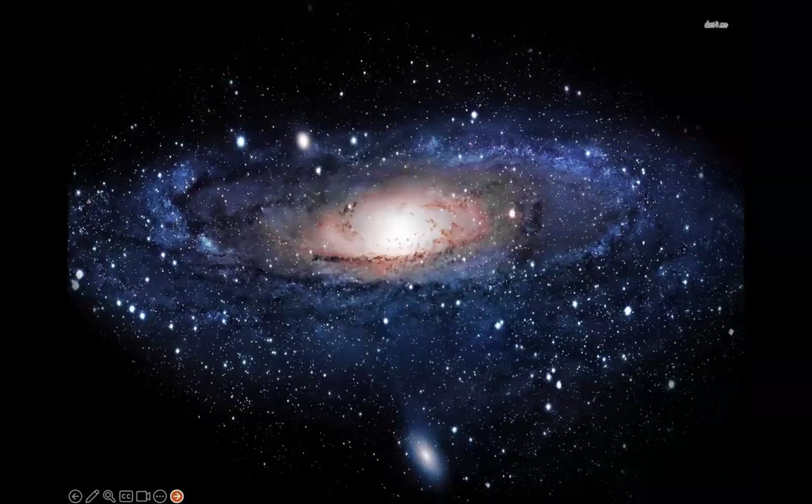So the first is that what makes water so special to me is that it is a part of our everyday and we take it for granted. And it is also a part of everything in nature that is just beautiful and magical.

So we all got up and we showered and we made our coffee or tea and we washed the dishes and our clothes, and in this country especially, water is just always there. We have terminology for when we lose electricity. It's a blackout.

We don't have terminology for when we don't have water. That's just eerie. If you've ever had a summer home and you turn on the faucet and nothing comes out, it's kind of weird because you always expect something to come out. That all being said, for as much as we take water for granted,

when you are hiking through the woods and you come across a brook or a river, if you ever come across a waterfall, or if you are standing on the beach and watching the breakers roll in, we can't help but be taken up by all of the magic, mystery, and everything that water is. We are over 75% water, so it makes absolute sense that we are so drawn to it.

Now, the second aspect of water that I am in love with comes from this image right here. When we talk about other planets and the space exploration that is going on, when we talk about a comet that comes around every 400 years, they talk about that comet being covered in ice. We are going to Mars, and we've discovered other planets, way out in the galaxy or in other galaxies. And we talk about the potential of water on that planet, the potential of water on Pluto, which we haven't even gotten close to yet.

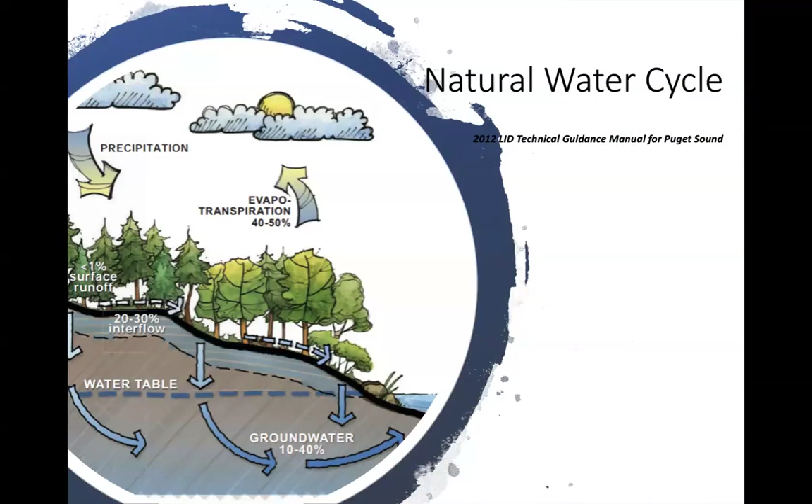This all goes back, and everything you are going to really learn tonight and need to think about water goes back to 5th grade, where we learned about the water cycle. Now, you don't necessarily need to memorize this slide, but I want to draw your attention to a few things. Over on the left, it says surface runoff, less than 1%. Interflow, 20 to 30%. Evapotranspiration, 40 to 50%. Just kind of keep those numbers in your head, because this is how water was originally designed to work, to be filtered, and to move through the earth.

Like I said, we've overcomplicated things. Water is extremely basic. The water was intercepted. The velocity of the water was stolen. It was set to the ground where it could infiltrate. A raindrop falls at 20 miles an hour. If you have a head like mine, you know that a raindrop falls at 20 miles an hour.

There are 2 types of water cycles, and this is what we didn't learn in 5th grade. So we have the long water cycle. That is the water cycle that we learned about in 5th grade, that the oceans evaporate, the clouds come off the ocean, they cool over land, and then we get these rainstorms. That's the deluge that we know. That is the heavy rainstorm we know. The more important and becoming scarce water cycle is the short water cycle.

Now, the short water cycle is extremely local. The short water cycle is what causes dew on the plants in the morning. The short water cycle is what causes a sudden sun shower on a summer afternoon. The short water cycle is extremely local, and it is water that is in the air through evapotranspiration, through small bodies of water like lakes and streams, or from puddles, or just from evaporation from the ground itself.

Now I want you to look at this image, and I want you to remember the last image. In the last image, we had less than 1% surface runoff. Here we have 20 to 30%. This is the urban water cycle. This is what pretty much all of us on here are probably dealing with. Now look at evapotranspiration, 20 to 30%. It was up to 50% before. The interflow is 0 to 30%. That was 20 to 30 before.

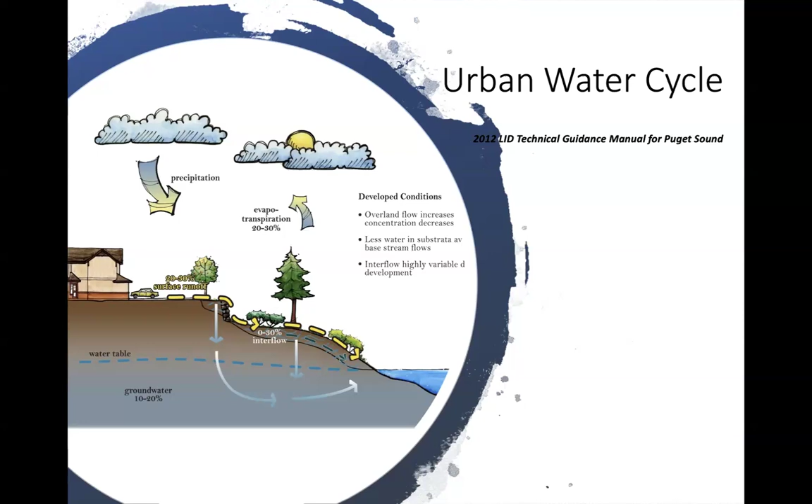Right now, we are just rushing it all into that waterway, and that waterway was never designed to handle all that water all at once. So that's why these rivers flood and crest, and we have many of the issues we have, because we've been tampering with the environment too much without thinking about the repercussions. Now, I promise you, this isn't a downer of a presentation, but I do want to present to you kind of how we got to where we are.

When you have a flooding problem, well, all you have to do is get the water out of there. You just have to get the water away. But that doesn't really do anything now, does it? Because we are nothing but a blue marble floating in space. So there is no such thing as away. If we call it an infiltration problem, then what do we have to solve? What we have to solve is, how can we infiltrate this water? When you call it what it is, and actually address the problem and not the symptom, you will get to the bottom of it and you will get the answer.

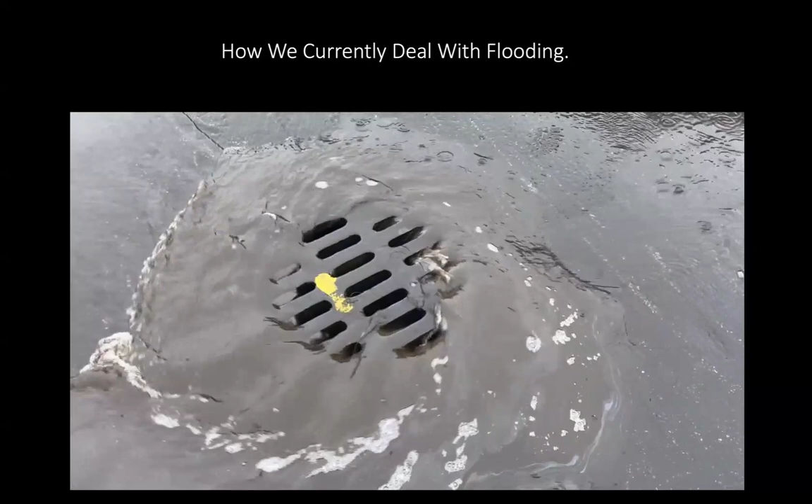This is how we deal with our flooding. That is how it all happens. And where does that water go? Like I just said, where is all that water going? That water's going away, isn't it? We're handling our flooding problem. That water's going away. Okay, show me away. There isn't an away. There's just an elsewhere.

And so, like I said, we need to address the problems, not the symptoms, because there isn't an away. That water that you saw going down the drain was just going somewhere else, likely to a river or a waterway of some sort. And you saw how muddy that water was. It is no surprise that we have the water issues that we have. Now, for the most part, until recently, and I still believe we can figure it out, the cool thing about water is it's indestructible.

We have yet to make water so dirty that we can't clean it. However, with the introduction of PFAS, we have really put ourselves to the test, because we have now introduced chemicals that we have yet to figure out how to pull out of water. And again, we need to address the problems here.

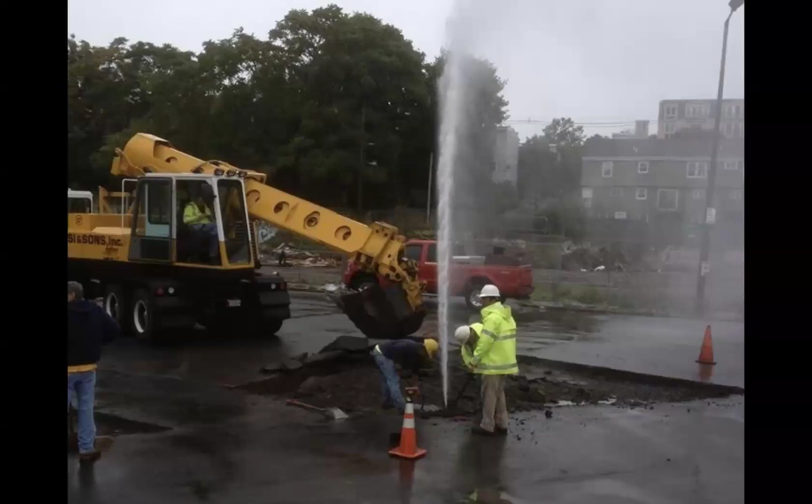We see things like this constantly. In fact, if you live anywhere in or around Boston and you actually start paying attention, usually every 2 to 3 months there is a water main break, sometimes more. But at least every 2 to 3 months, there is a water main break within the city. This is because we built our water infrastructure, as you will see here, during a water main break back in 2019. This is actually a wooden pipe in Boston, a wooden pipe from the 19th century. So this just shows you how old Boston's water infrastructure is.

Now in Arlington, where I recently moved from, Arlington and Belmont, their water infrastructure is at least 80 years old. So I'm just going to ask, real rhetorical question here. From the 19th century, do you think Boston's population, water demands, and impervious surface has changed at all? Yeah, of course. So this is what our problem is. We put all of our water infrastructure in the ground, put Band-Aid on Band-Aid on Band-Aid over it, and just kind of limped it along.

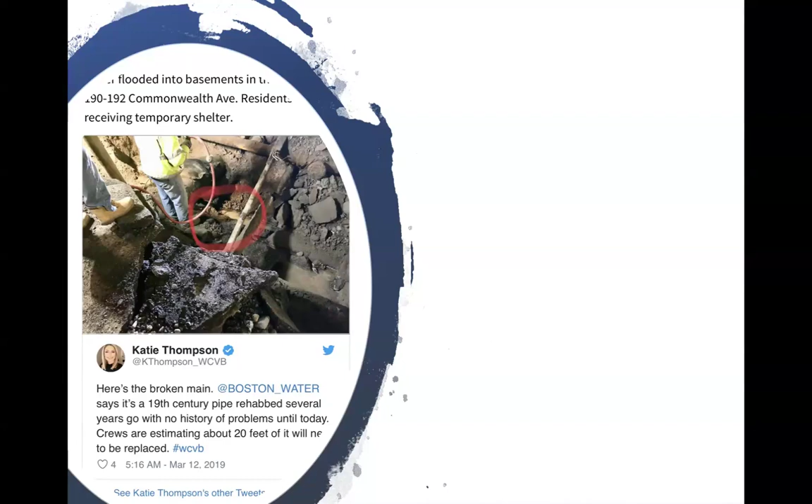And now it's to the point where if we are to bring it up to date, it is going to cost billions of dollars, and we're going to have to tear up the entire city. So now nobody knows what to do with it. So you could put your hands on your head and be like, oh no, we're doomed. What are we going to do? Well, what you do is you look at this as an opportunity. And I will tell you about that opportunity in just a second.

So in hearing about water conservation, you will be told, and you may believe, oh, if I just didn't let the faucet run, or if I don't flush the toilet so much, or if I don't use landscape irrigation, the water problem in my town or in my city, it's my fault. Well, 12 billion gallons of water are lost per day globally due to faulty infrastructure.

So while your municipality may have you believe that the water issues are your fault, and maybe some of them might be, or your neighbors, if they're watering every single day at high noon, then yes, they are part of the problem, not the solution. But that all being said, the municipalities need to start taking some responsibility here, because that outdated infrastructure is leaking a lot, and we are losing lots of water.

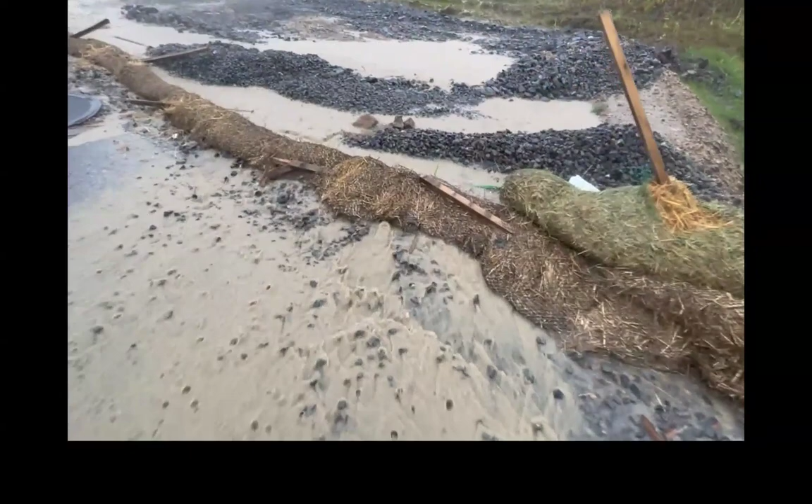However, that is just a checkbox that construction companies and land clearing companies just check. And then we wind up with situations like this, where they threw up the straw wattle so they're in compliance, but then drove over it for months on end. So is it really controlling that erosion? No, not so much. And here's that subdivision going up.

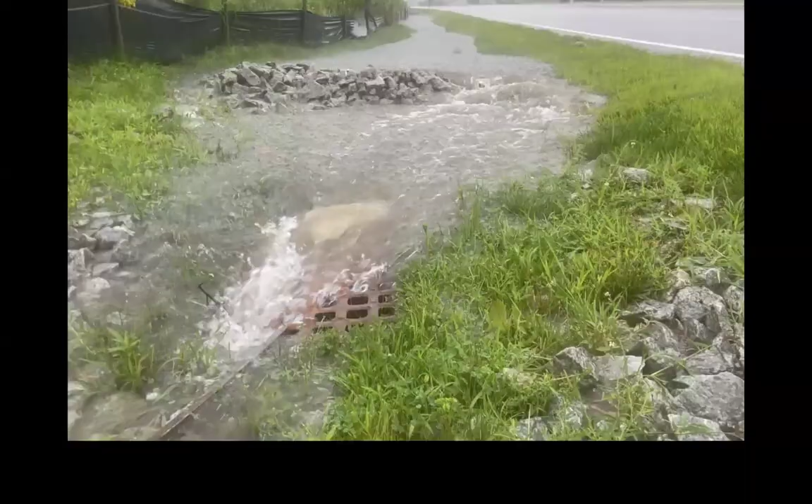And there is all that water en masse. So it starts as a little raindrop, but those raindrops, when they get together with all their friends, create something like this. And this retention pond was severely undersized for the amount of runoff that it was receiving. And you can see the volume and the velocity that this water is traveling with. And you can see all of the sediment due to poor construction practices that water is taking with it.

Now, this water all ran down and wound up in Weston Nurseries' irrigation pond. So all of that sediment, which ended up being about 2.5 feet of mud by the end of the season, all washed into the irrigation ponds. Now, in a similar situation, same with those irrigation ponds, all the sidewalks in this subdivision were heavily salted by the landscape companies over the winter.

So in spring of '23, Weston Nurseries actually needed to pump out and then dredge the irrigation ponds because the salt level was so high. And if we hadn't been having conversations about stormwater runoff, of which I am a huge advocate at Weston Nurseries, we probably would not have checked the salt levels of the pond and probably would have killed all of the tree stock that we begin to bring in March. So things to think about, and the power of runoff.

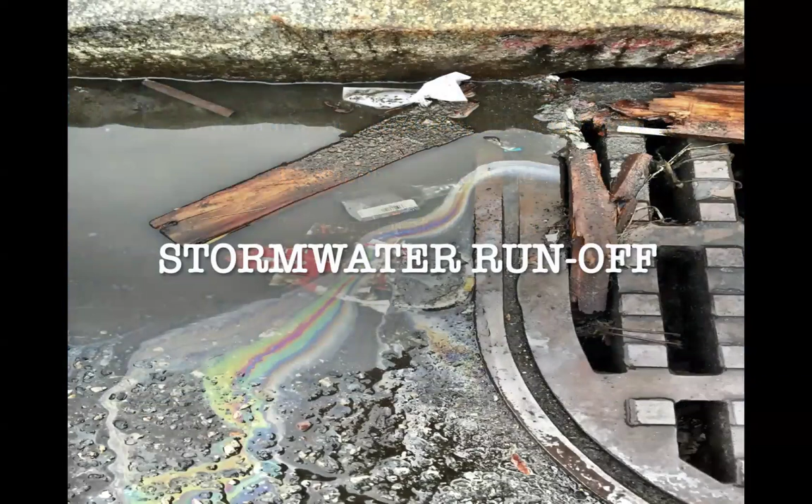So the two main issues regarding freshwater are supply and demand and stormwater runoff. We today are going to talk about stormwater runoff. As I said, I'm going to go into stormwater runoff and then talk about very simple methods that you can adopt on your property or adopt into your business to help control stormwater runoff.

Now, in the city of Boston, it is now a law that if you have a major renovation or a new construction, you are required to keep all of your stormwater on your property. If we had made that a law 30 plus years ago, or even 30 years ago, we may not have the flooding issues that we have right now.

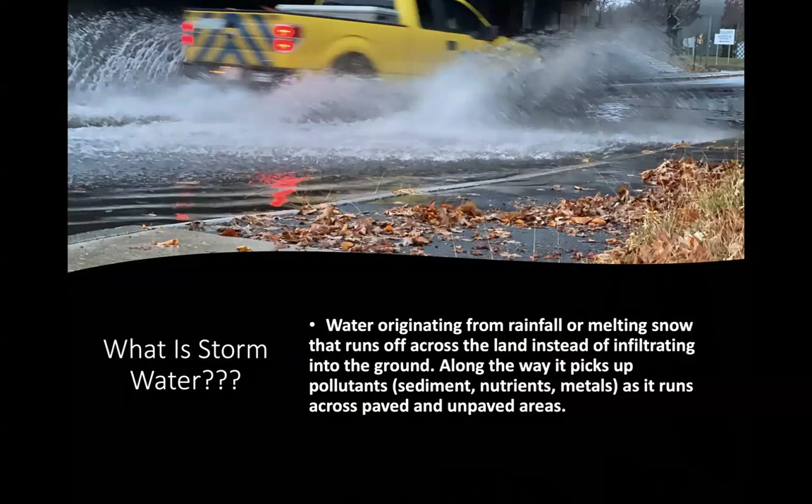So first, let's just address the definition. What is stormwater? Water originating from rainfall or melting snow that runs off across the land instead of infiltrating into the ground. Along the way, it picks up pollutants such as extra added nutrients and heavy metals as it runs across paved and unpaved surfaces. So this is another shot from Arlington, where we had a flooding issue. What difference does it make if the glass is half full or half empty when the water is polluted? And that is just a fact that we need to address.

So while we're thinking about stormwater, about 10 years ago, Boston ran this competition, Boston 2050, and they asked architects and land planners to submit designs of how we could deal with the rising sea levels in Boston and how Boston could adapt to those rising sea levels.

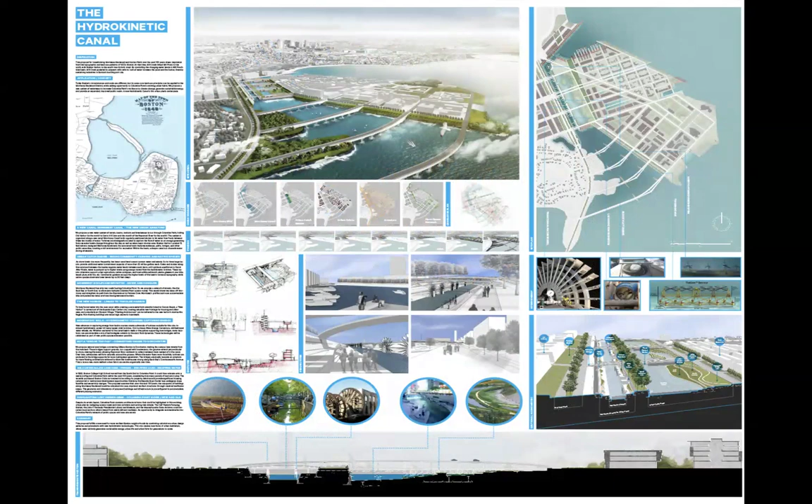And, you know, here we have canals with gondolas, we have oyster beds, and we have all of these storm channels, and this is all attempts to make rising sea level actually pretty and adopt it into the overall landscape of Boston. Boston is one of the 14 cities that will disappear if sea levels continue to rise at the rate and level they are rising.

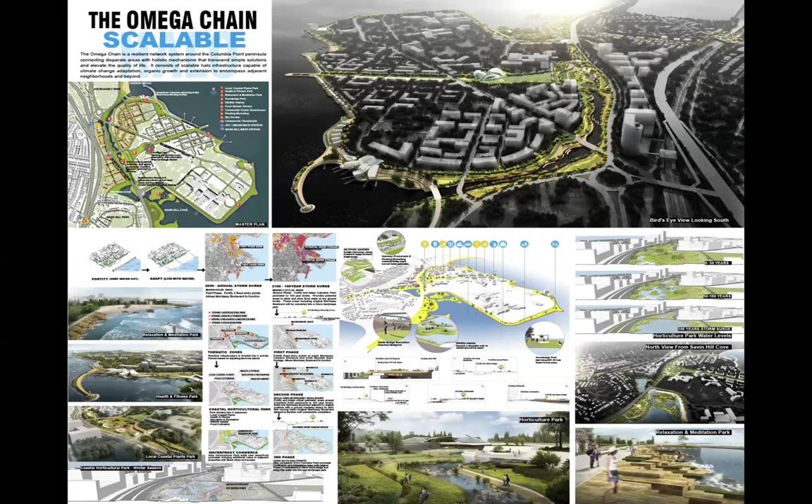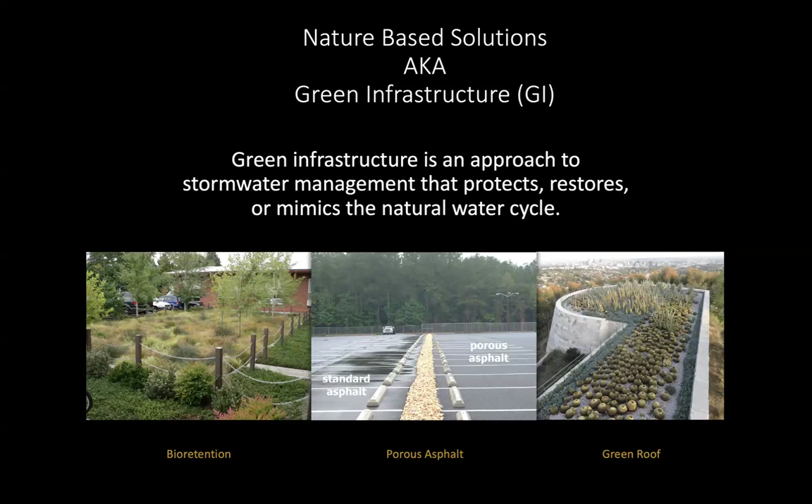So defining green infrastructure. Nature-based solutions or green infrastructure is an approach to stormwater management that protects, restores, or mimics natural water cycles. The built environment isn't going anywhere. So we need to find ways to build it better. And that is exactly what we will be talking about moving forward.

Now, I've been doing this for over 20 years. For years, people have said, oh, that green infrastructure, oh, that stormwater management stuff, all that new stuff, that new technology, well, that's really not that proven. We're not really sure about it.

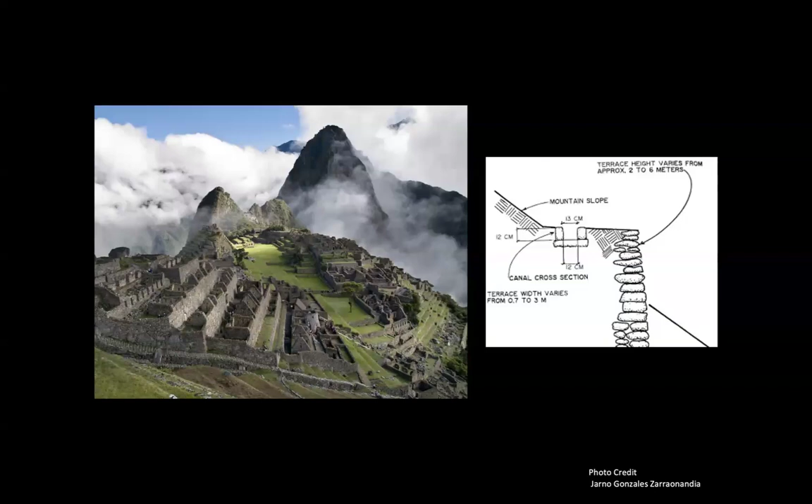And I want you to look at the black and white, because the black and white is levels and grades of gravel and stone and soil to help infiltrate the water and move it down the mountain, eliminating runoff so the whole entire empire didn't wash away.

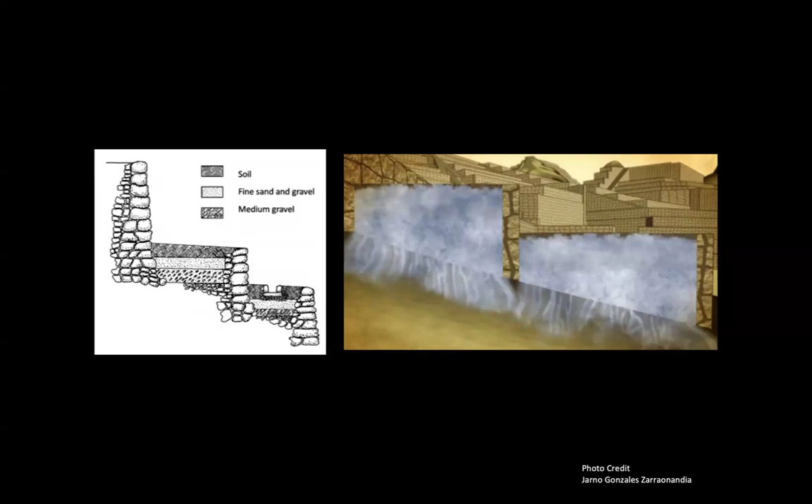Like I said, stormwater management today is much the same way and very simple. Along the same lines, because what you are going to see is we are going to use different grades of gravel and different ways of managing the landscape to slow the stormwater and to infiltrate the stormwater, to reduce the volume, reduce the velocity, and increase the infiltration. Those are the 3 points that you just need to keep in mind anytime you're...

I didn't get that. Oops, could you try again? Sorry, Siri was listening to me. No need to apologize.

So the challenges that I have found along the way, and that you will find, especially when you get onto a municipal level of dealing with green stormwater infrastructure: a lack of understanding. There is definitely a lack of understanding when you are talking to DPWs, when you are talking to urban planners. They're not necessarily sure what green infrastructure is. Lack of personnel. You will often hear that we don't have enough people to take care of stuff like that. Our people are trying to take care of all the storm drains and everything that we have.

Mistrust in the ability of nature. This is one that I came up with, and it really hit home when it kind of hit me, because nature has been filtering water and controlling stormwater better than we've ever been able to for millennia. Yet we do not believe that nature has the ability to clean and infiltrate and control stormwater for some reason within our built environment.

Bad experiences with mismanaged GI. And this is something that happens all the time on, say, Earth Day, or say a tech company wants to do a good thing, or even an Eagle Scout. Somewhere along the way, somebody says, hey, we're going to build a rain garden at the library, and then nobody takes care of it. And what people say to me is, oh, that became a pit for invasives and trash. Well, on one hand, that's what it's supposed to do. It's supposed to keep trash out.

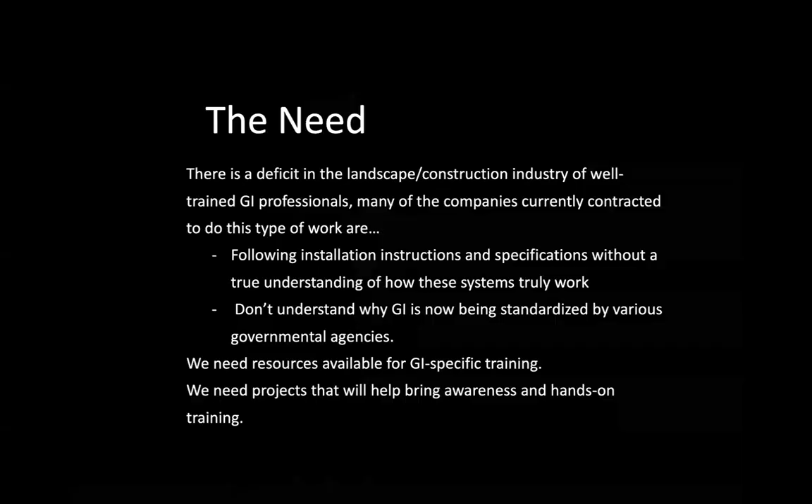So we need people who are just informed and have an understanding of what green infrastructure is about and what stormwater is about. So what we will be covering today: we will be covering rain harvesting. We will be covering permeable pavements, rain gardens and bioretention systems. We will be covering and touching on green roofs and tree plantings.

So that is what, yes. We were scheduled to go till 8. I'm okay going to 8:15, but I just want to give you a time check. Wow. Okay, then I got to go really fast. Sorry. All right. I do apologize. I just noticed the time. So yes, thank you. I'm going to have to fly through this and we will be more along the lines of 8:15. So please don't interrupt me for any questions. Let me get through this and show you what's what. I am sorry it took too long in the intro.

All right. So rain harvesting systems. We have rain barrels and we have rain harvesting systems when we're talking rain harvesting. Why are we going to rain harvest? Well, life on this planet is directly connected with water. Without water, we will die within days. The EPA calculates that we use 165 gallons per day, 95 outdoors, 70 gallons indoors. And much of that is flushed and does not need to be potable or drinking water. Only 1%, and actually less than 1% of the Earth's fresh water, is available for our use.

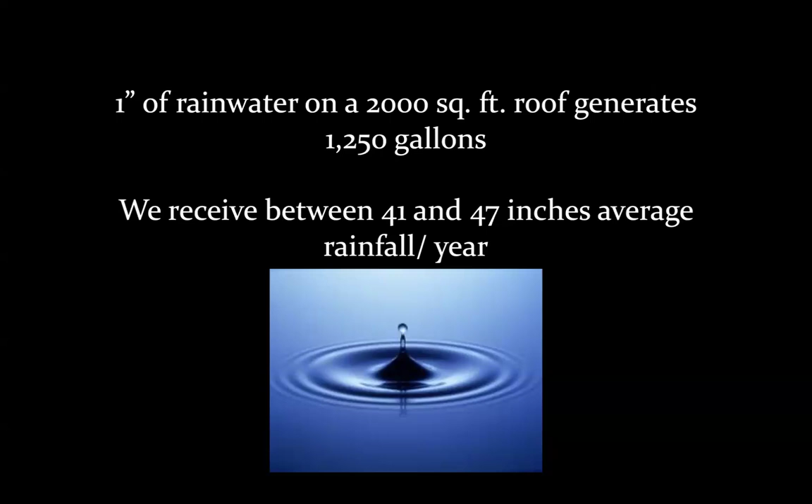So what does this all mean for rain harvesting? In a 1-inch rain event on 1 acre, we can capture 27,000 gallons of water. For those of us who live in urban environments, 1 acre is a little bit hard to imagine. So let's take that same 1-inch rain event and put it on a 2,000 square foot roof. On that roof, we have 1,250 gallons of water. In New England, we receive 41 to 47 inches per year. So if you think about that as stormwater capture, you are actually able to capture a whole lot of water.

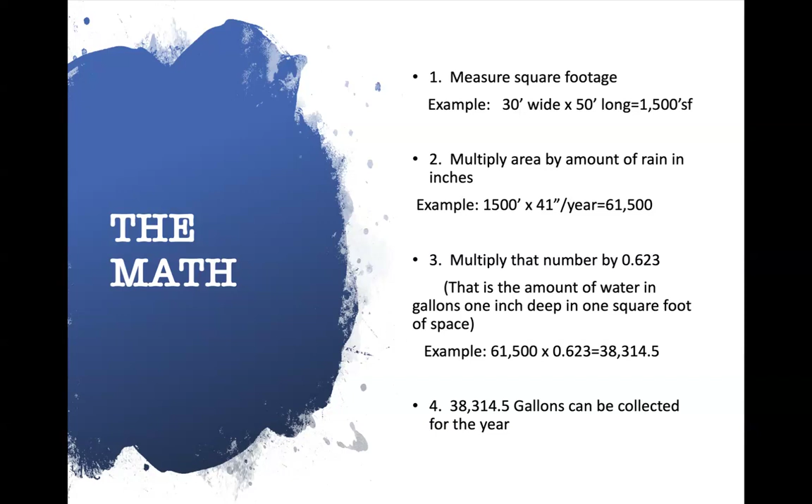So here's the math, just really quick. You're going to take your square footage and multiply that by the inches, here it is inches per year, then you are going to multiply that number by 0.623, and that is the amount of water in gallons 1 inch deep on 1 square foot. So when you do all of that out on 1,500 square feet, you can capture 38,000 gallons a year. So it actually adds up pretty quickly. It's real easy. This is like field math that I use when I'm discussing with people the potential of their rainwater capture. So how can we use rainwater?

Well, here, mostly in Massachusetts, and it varies from county to county, but really the way you're going to be able to reuse rainwater is in the landscape and in our flower beds. You can use it to wash your cars, your patios, your decks, top off your ponds, your swimming pools, your hot tubs. If you are out west, you can use it to protect your property from wildfires.

And what I wish we could do would be use it for toilets and laundry, because we do not need drinking water to flush our toilets or do our laundry in. So there's no need for that. But however, the water companies and the municipalities make their money with the water that comes in and the water that goes out. So most places will not let you interrupt that money flow by interrupting the water flow.

So rain harvesting, we have rain barrels. Rain barrels are the gateway drug to rain harvesting. I have a love-hate relationship with rain barrels because I love them because they make you aware of stormwater capture and how much water is actually running off your roof. I have a dislike for them because you can only capture 50 to 75 gallons at a time, and there is no real pressurized way, unless you're going to add pumps and the like, to get that water out efficiently.

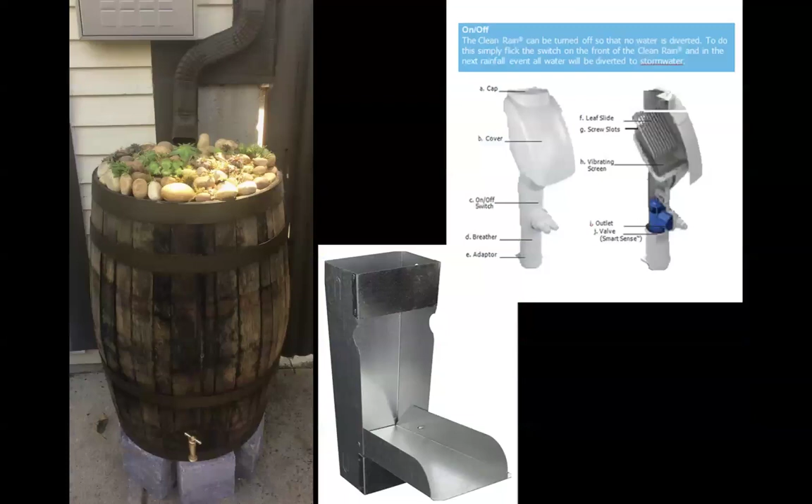A 50-gallon rain barrel will fill very fast because the normal downspout in a 1-inch rain event is putting out 110 gallons. So it's really not necessarily enough to capture all the water that you want. When installing a rain barrel, I absolutely suggest that you use one of these downspout diverters. What this does is this allows you to funnel the water into your rain barrel during a rain event.

If your rain barrel is full, or if you take the rain barrel away for the winter, you can close that up and it will allow your downspout to function normally. Otherwise, as you see in the picture on the left, that water is just going to splash onto the ground all winter long. Here we have just an image of a rain barrel installation with the downspout diverter.

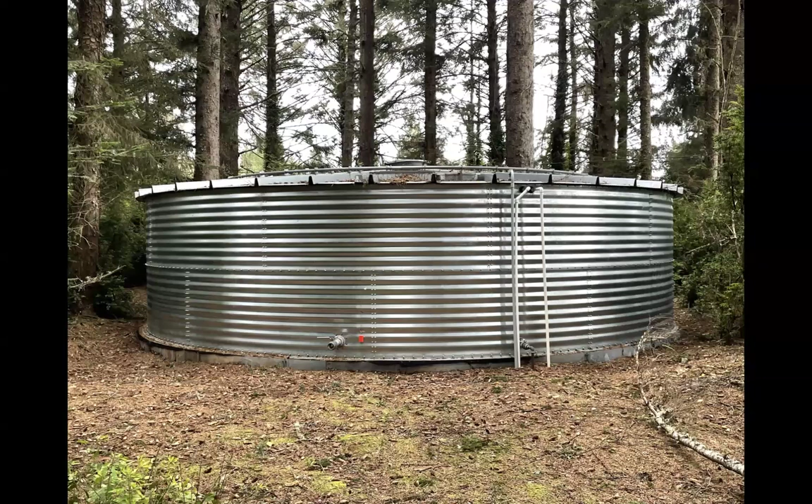Now we can take that to a much larger scale. This was out in California, an extremely impressive tank used for multiple purposes out there. It was actually plumbed to the house out there as well, but they can come in all sizes, but they are very hard to hide. If you think an AC unit's hard to hide, try hiding that.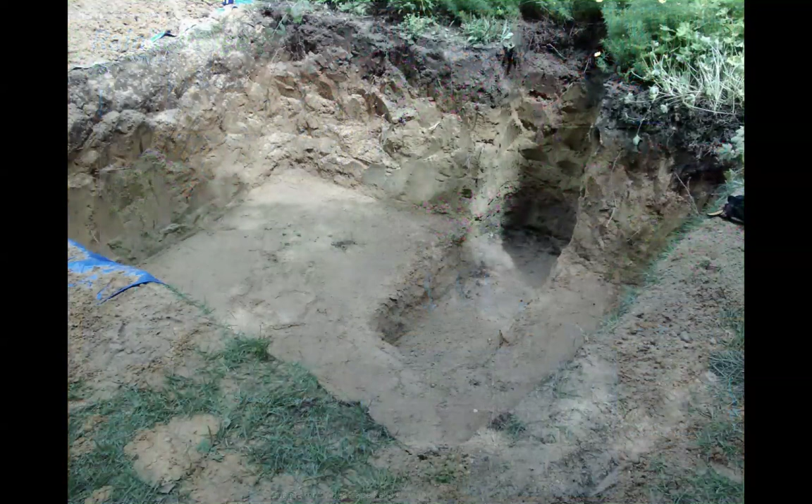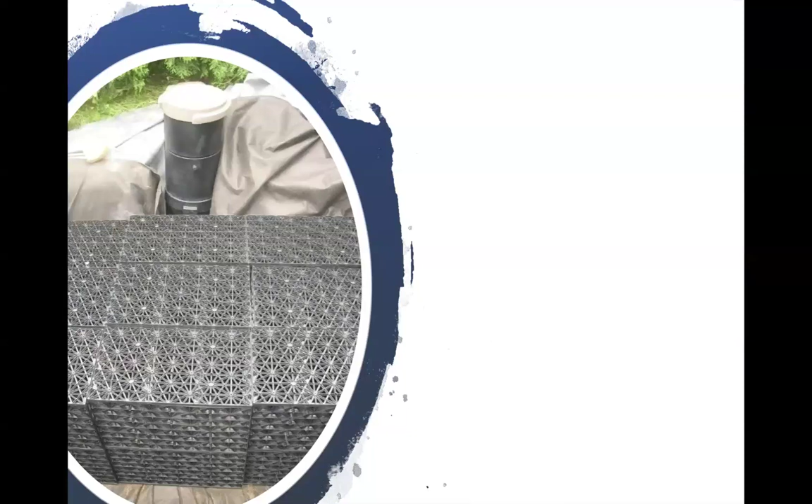As I said, I was going to walk you through each installation. So it all starts with a very big hole. Most of these do. Here we have the pump house installed. The hole is lined with a rubber liner. Then these blocks are installed. Now, in the beginning, we used to use large rocks, but these blocks are great because each one of these blocks can hold 27 gallons of water and are actually H20 rated. That means that you could drive a car or a light truck over them and they will not collapse.

This client wanted to both water their gardens during water bans and attract habitat. So we took that rain harvesting system. We added a fountain that was just recirculating the water within the system for the habitat value.

And then we also installed it to a spigot and a timer so that they just had to set the timer. When the timer goes off, the spigot opens, the pressure pump inside senses the drop in pressure and will start pumping. When the faucet closes, the pump just shuts itself down. And so we collected about 1,200 gallons off their roof that they could use just in case there was a water ban within their neighborhood.

Then they went ahead and gardened around all of it and were able to support habitat, both birds and pollinators, with the wet rocks below, and capture their water. This is a similar system down in Dorchester. This is a LEED home in Dorchester.

So we had a native/nativar landscape that we put into the ground. And then they were able to irrigate their landscape. Now, because it was a native landscape, they actually only irrigated their landscape for one season and have never had to turn the irrigation on again. So now they just have this fountain with 2,000 gallons of water in reserve just in case they need it.

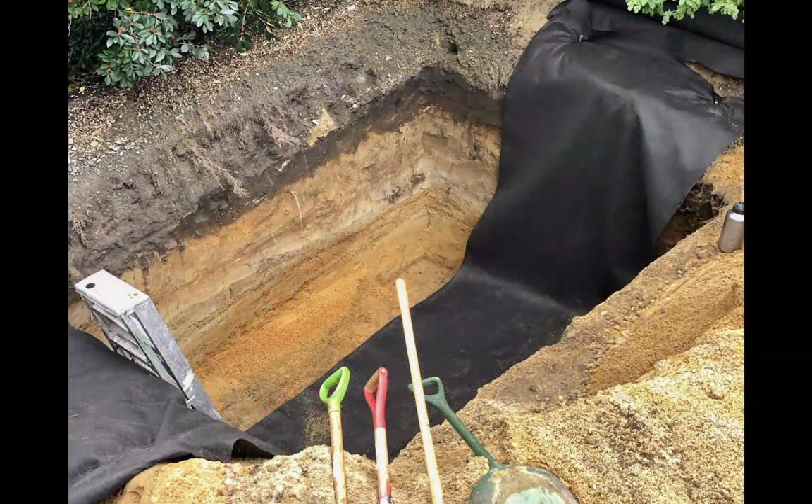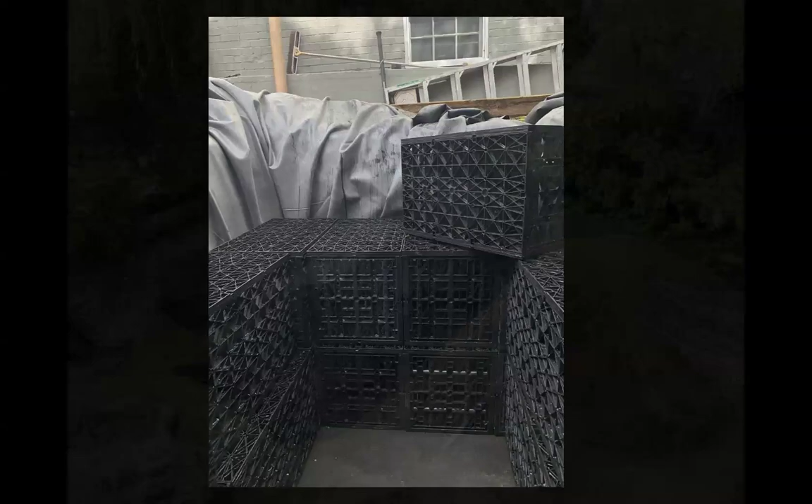Finally, we were able to do a kind of hybrid garden. This rain harvesting system right here, you can see there's the liner, there are the blocks. This then ended up getting covered with sand and gravel, and we did a semi-pervious driveway that they wanted to have planted up with clover, chamomile, viola, and thyme. So you can see we planted all of that up.

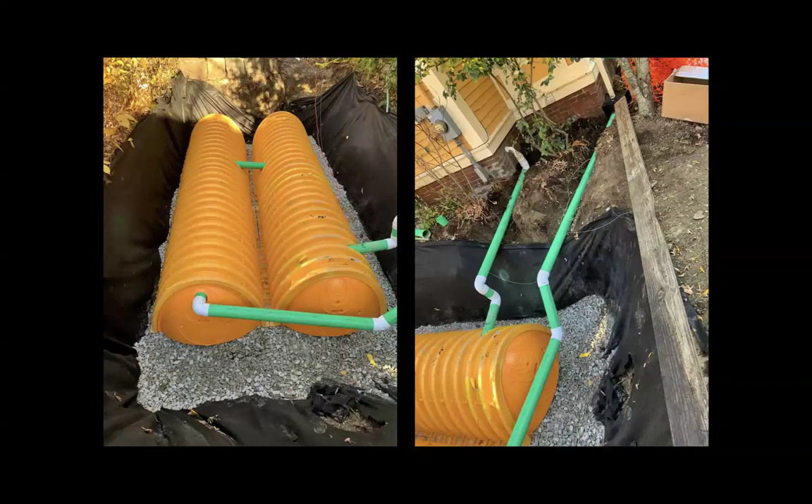The clover is the workhorse and can take the traffic of the car going back and forth. And then the flowers just ended up coming up and adding interest along with the thyme on the periphery where the car was not and the full sun was. Now, with all of this, you can install a very similar system. If you're not trying to capture and harvest your rainwater, you can put in a dry well.

So this was a very similar situation where we put a dry well in off the house to capture the sump pumps and the gutters because they were experiencing flooding. This is in Somerville. They were experiencing a lot of flooding because the sump pump itself was dumping out at the base of the foundation and then just making its way back into the basement, on this infinite cycle. So we put all of that into a dry well.

Now, a dry well doesn't capture that water for later, but it actually captures that water and allows it to infiltrate. So it takes it away from the foundation, allowing that water to infiltrate.

Boy, I got to keep moving.

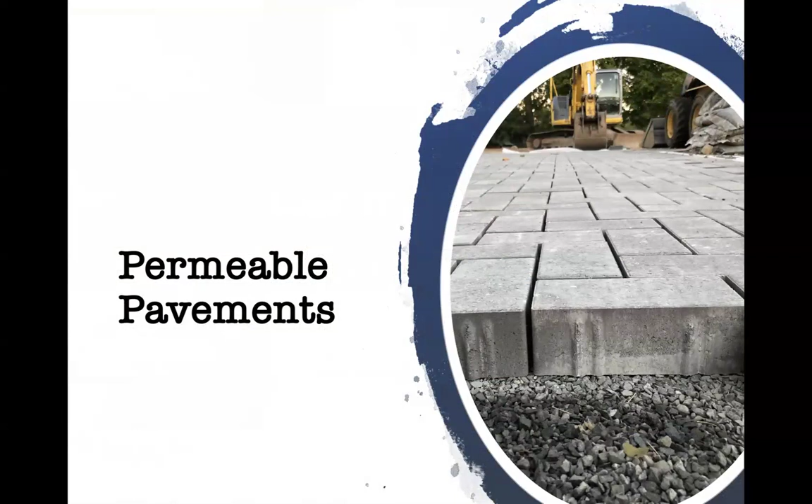I'm sorry. So we move into permeable pavements. Permeable pavements are a wonderful technology used for removing asphalt. They can be used as sidewalks, driveways, and the like. The paver, as you see here, the block itself is not permeable. It is made permeable by the joints and supported by the base below it. It is all about the base below.

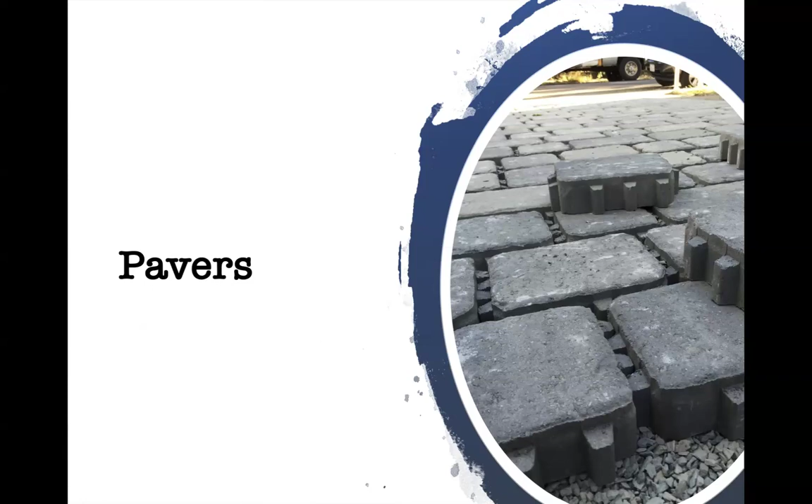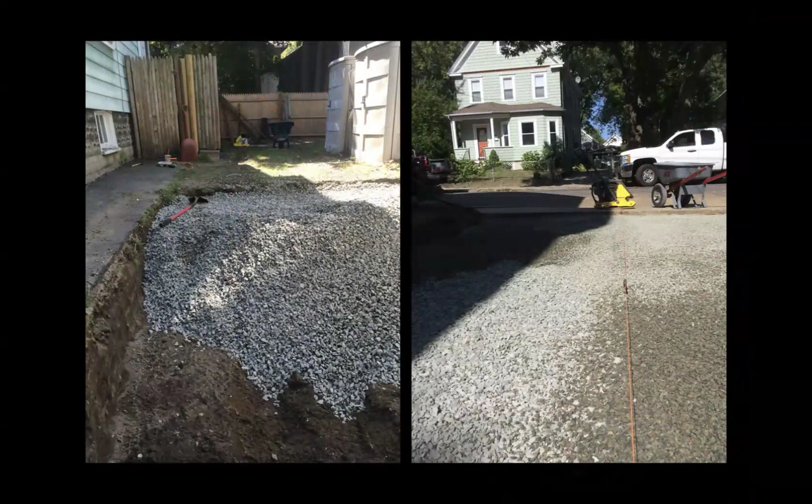So here in this situation, this was also, I believe, in Somerville, and we had two homes, and you can kind of see the homes in this picture. Each home was a triple decker, so we had about 1,200 gallons of water in a 1-inch rain event, all dumping out between the two homes.

And my client was getting water in their basement because these homes were built in the early 1900s. So they were getting water in their basement. They had tried a dozen things and really hadn't figured out how to get through it. So we put in the permeable pavers here.

Now you can see in that last slide, it all starts with a lot of gravel. That gravel is basically the storage vault for all the water. It provides all the pore space for the water to go to, similar to a dry well, so that it can seep into the ground. Now here you can see in this image, and I'll show you in some other images, there is no sand, there is no stone dust. It is just different grades of gravel.

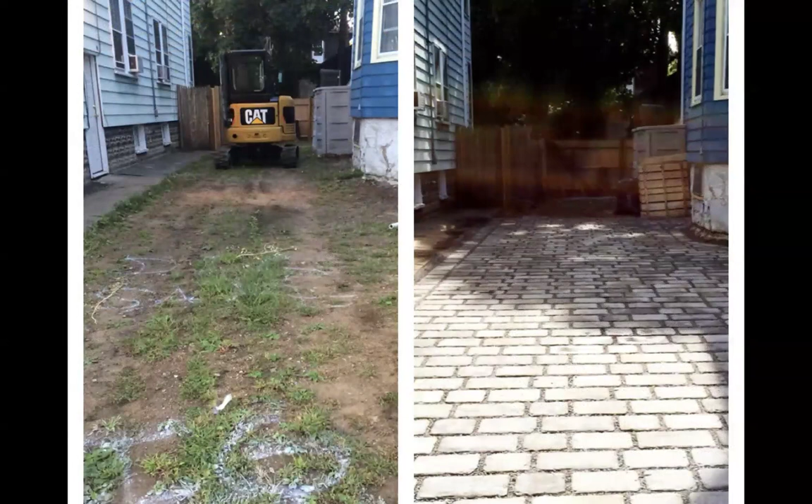So the base layer, which would be sand or stone dust, is actually 3/8 chipped gravel. And the stone filling the cracks isn't stone dust. It's actually what's called the number 9 stone, which is like stone dust without the fines. So here we have the before. They took their asphalt away, but then it got extremely compacted with the car driving over it. My client's house is on the right.

And then here we have the after. All we needed to do was give the water a better place to go, and it didn't want to seep through the tiny cracks of the foundation. Water will take the path of least resistance. Give it a better path, and it will follow that path. This whole system that we did will handle up to 6,000 gallons of water.

We also did a very similar application at the Beardsley Zoo. Here, we were not able to do the entire parking lot.

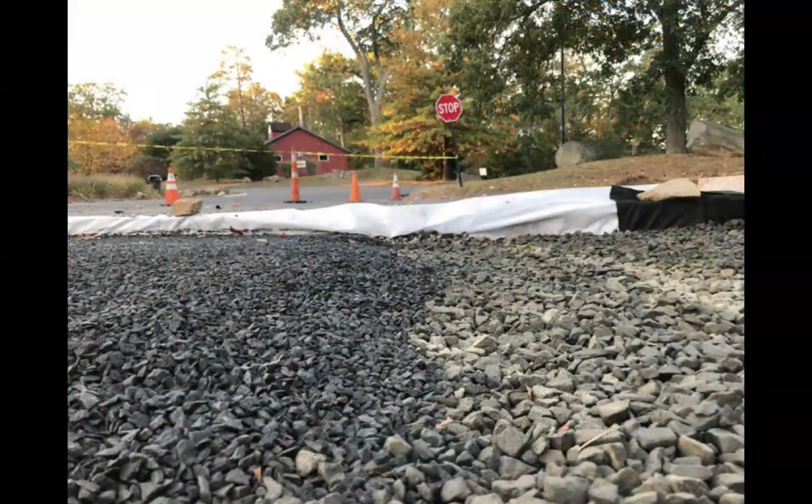Sorry, the Beardsley Zoo. Here, we weren't able to do the entire parking lot, so we cut out sections of the parking lot and installed permeable applications. So this way, as the water is running down the parking lot, it doesn't actually make its way all the way to the river at the base of the hill. It gets infiltrated by these paver sections. So it doesn't have to be an all or nothing.

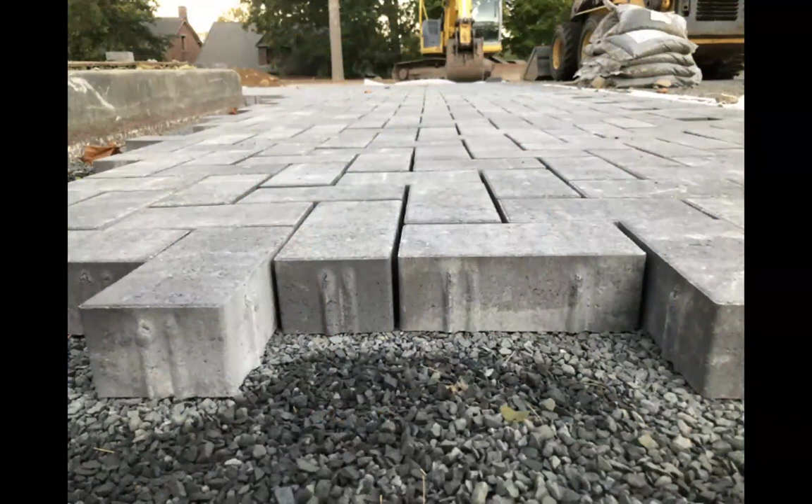You can infiltrate the water in what I call sips. So you have it running down an impervious surface, and then it falls into this, and you will have some more running down an impervious surface, and it falls into another little trap. So you're taking the water out of the system in sips. And here you can see those grades of gravel once again.

Just another image of a permeable driveway. Same here, this customer wanted to take up their asphalt. They needed to take it up anyway because it was crumbling, and they wanted to shovel less. One of the benefits of permeable driveways is that during the freeze-thaw cycle, when we have the thaw, all the water works its way through the system, so you don't have that surface icing. You also don't have the frost heaves because the water doesn't sit below the pavers, so it doesn't push them up.

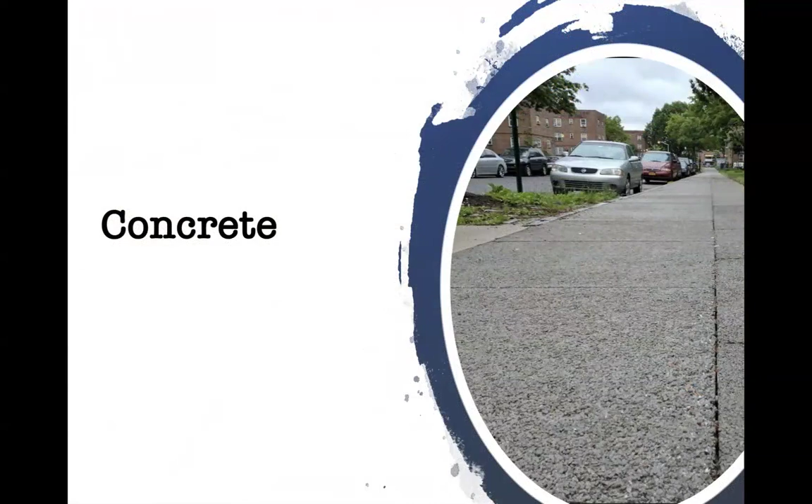Another technology is pervious concrete. The best way I suggest doing pervious concrete is precast systems like this, which is almost like the permeable pavers. You can do pour in place pervious concrete. It just takes a very long time to set because it doesn't have the fines. It's concrete without the fines. 10 years ago, it was really hard to find companies that would make this for you, because they basically have to make you a special batch. Same with pervious asphalt. But you are finding more and more companies that will make these for you and either do a pour in place or a precast.

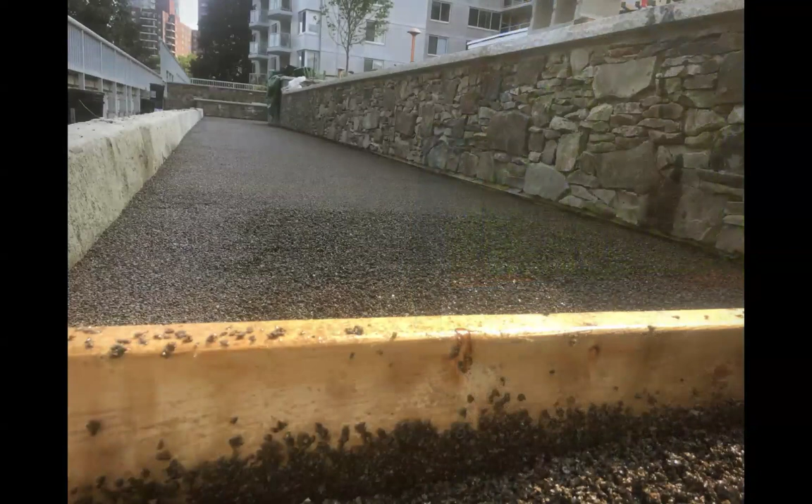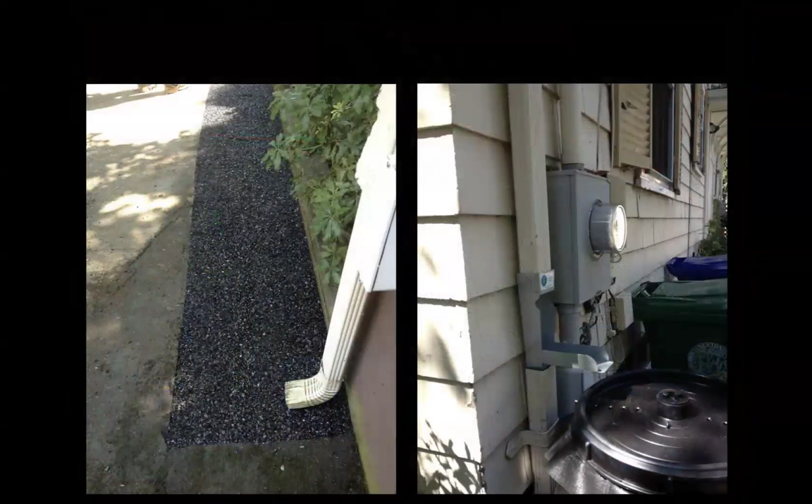And then finally, we have alternatives. This is an alternative made from recycled tires with a urethane binder that is real easy to mix together on large and small applications. I no longer use this product, but did use it quite a bit on a number of projects because it infiltrates a whole lot of water. It's extremely pervious, and I really did like it for a while. What I didn't like is that the company promised that it was going to continue to be able to be recycled, and in the end, they never delivered on that promise. So I stopped using it. It's similar to having a sweatshirt made out of recycled bottles. Once you're done with that sweatshirt, essentially all those recycled bottles go back into the landfill anyway.

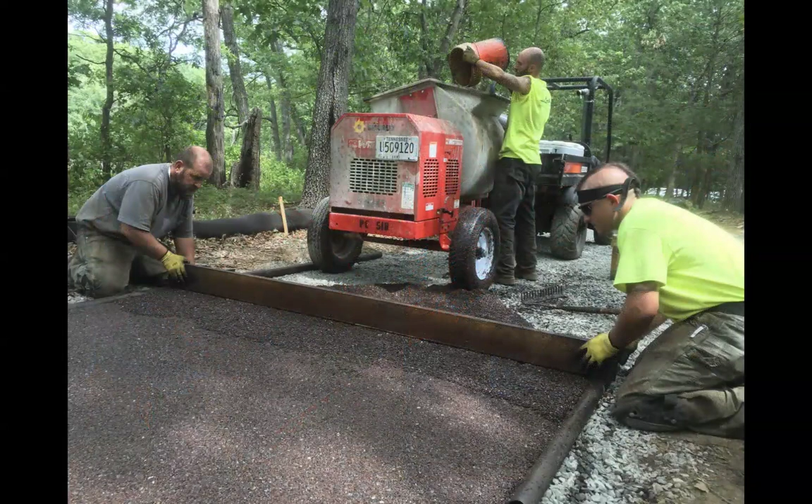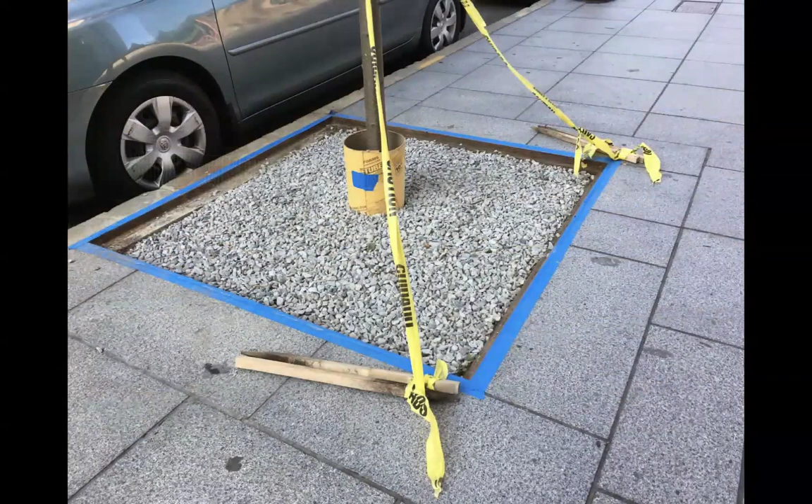One of the best applications for this is in tree pits, I find, because you are certainly protecting the tree roots and you are keeping all of the trash and sediment out of the root zone for the tree. It's also very easy to walk over and very easy to maintain. So I like it very much on a small scale. This is at a golf course down in Connecticut, the Winged Foot Golf Course. They wanted to eliminate the gravel, which was going everywhere, and they wanted to keep their permeability. So this worked out really well for them there.

And then here is that walking path that I told you about in Wellesley Office Park. This was put in by John Hancock. And it just meanders its way through the woods and along the Charles River. The idea here was not necessarily to infiltrate water, but to put in a path that did not disrupt the water cycle and made itself accessible to all people.

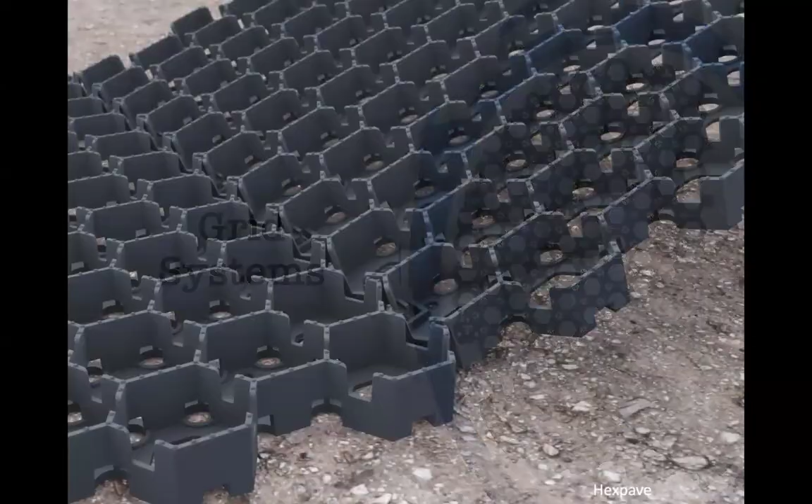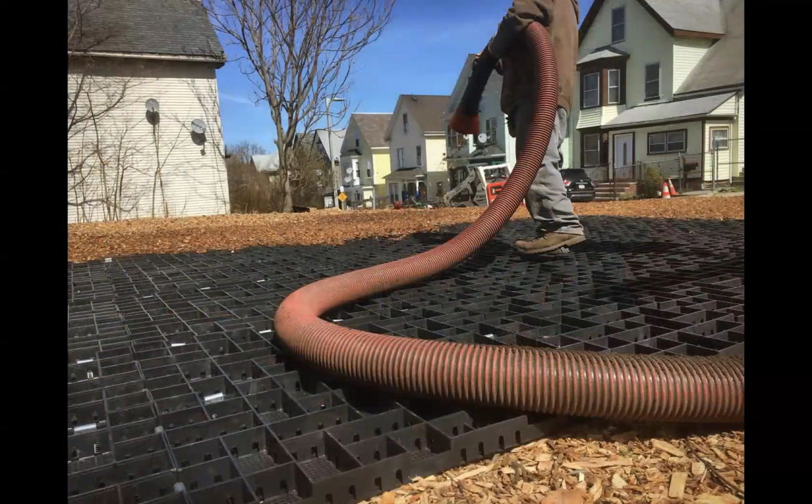Grid systems are another system that you can put in. This is better for overflow parking. If you are installing an area like the kids come home from college and you need to park on the lawn, this is a great way that you can have your lawn, but also prevent compaction. This is just an application of it that we used differently for an urban garden that we then covered with mulch to give a stable surface for people to walk on.

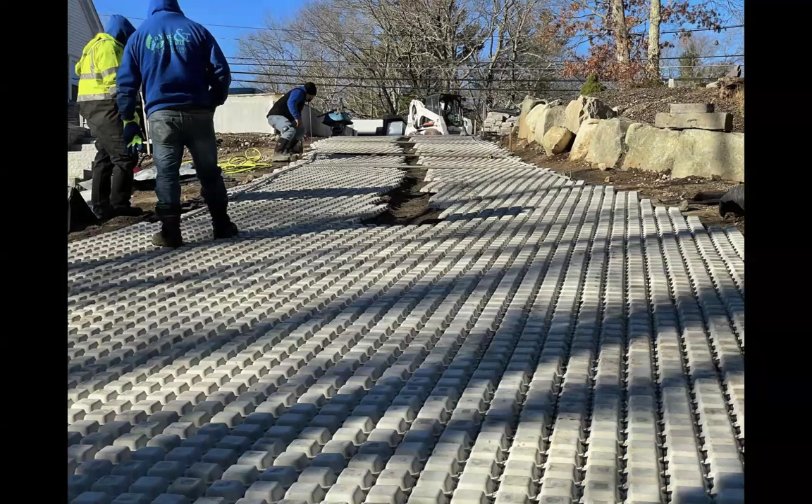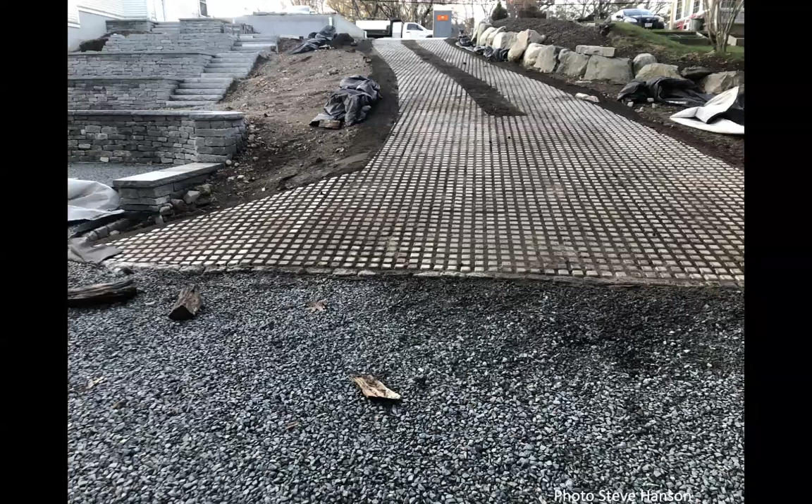Finally, we have these grid systems. This is drivable grass. These are concrete tile slabs. They look kind of like bathroom tile. They're all kind of stuck together in big squares. You apply them, you then fill them with soil. And here we planted that with the same clover mix that we talked about before, so that the client could make their way down into their backyard to a garage that they had down back there.

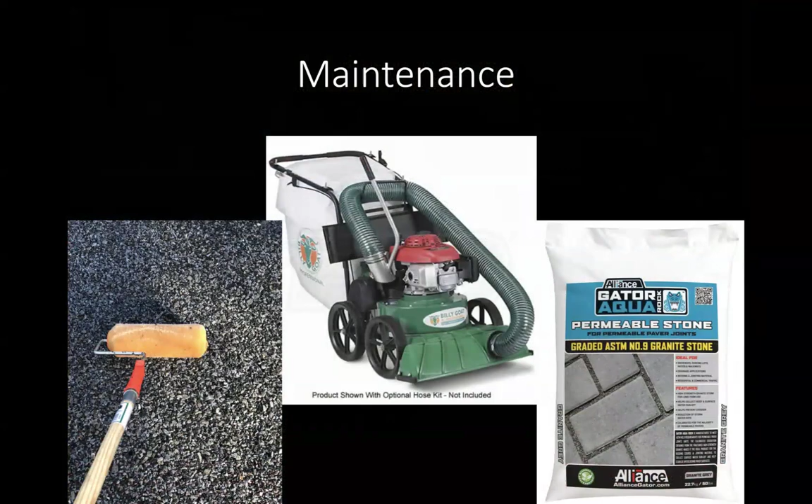As I mentioned, all of these things need maintenance. The pavers need to be vacuumed out every few years. You need to just suck out all that grout, all that little stone, and then you need to apply new stone. Otherwise, over time, they'll get clogged with some kind of sediment or organic matter. The alternatives usually need to be resealed every few years. So just remember, these are not without maintenance.

Moving into rain gardens, and again, I'm sorry that I'm taking so long. So for rain gardens, we have rain gardens and we have bioswales. Those are the terms you are going to hear. A rain garden essentially is for one downspout at a home, and it is using the native soils, and it is planted with, I say, just use your favorite perennials. If you watch too many YouTube videos, you're going to overthink your rain garden.

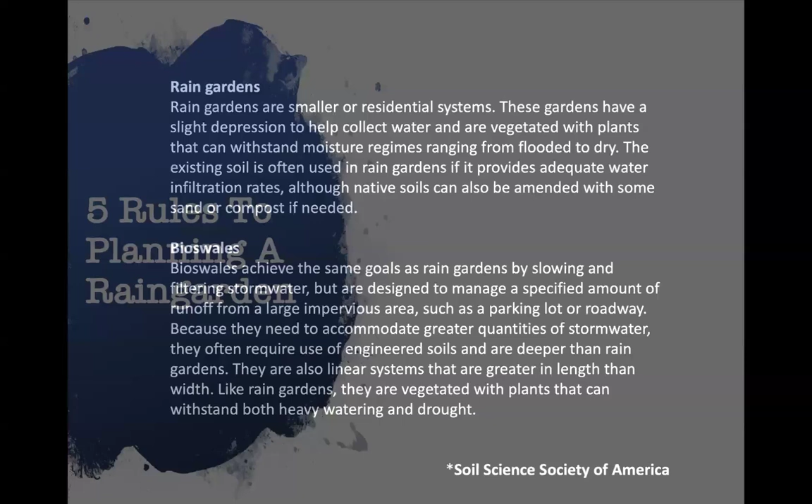A bioswale or a bioretention system is engineered to infiltrate a certain amount of water at a certain rate, and usually has an overflow and an underdrain. So it is a much more engineered system designed for parking lots and the like. So a rain garden is probably what you are going to be looking at. Here are the 5 basic rules of a rain garden.

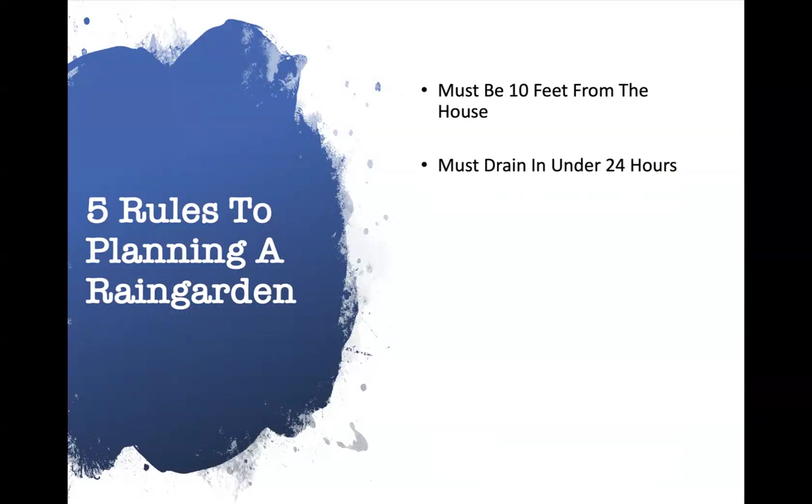Must be at least 10 feet from the house. You do not want to infiltrate a few hundred gallons right next to your foundation, so be at least 10 feet from your house. It must drain within 24 hours, so dig yourself a test hole, fill it with water, let it drain, then fill it again. If that water is there for 24 hours or more, I suggest you do not put in a rain garden on your property. Never put a rain garden in an existing wet area.

The idea of a rain garden is to infiltrate water. So if you are trying to drain or dry out a wet area on the property, build the rain garden upslope from that area, and you will reduce the amount of water that is actually in the lowest area of the property. Do not use wetland plants in a rain garden, because your rain garden, especially in a season like this, will be dry more than it is wet, which is why I suggest using your favorite perennials, because pretty much any perennial can stand being inundated for 12 hours or so and be just fine.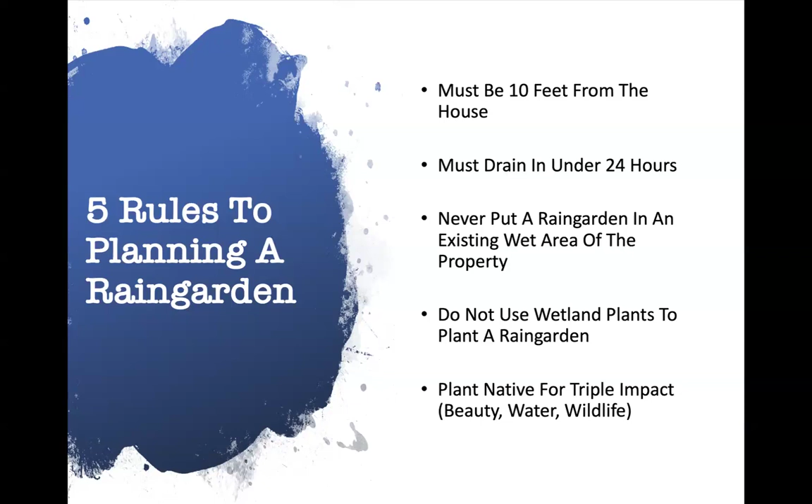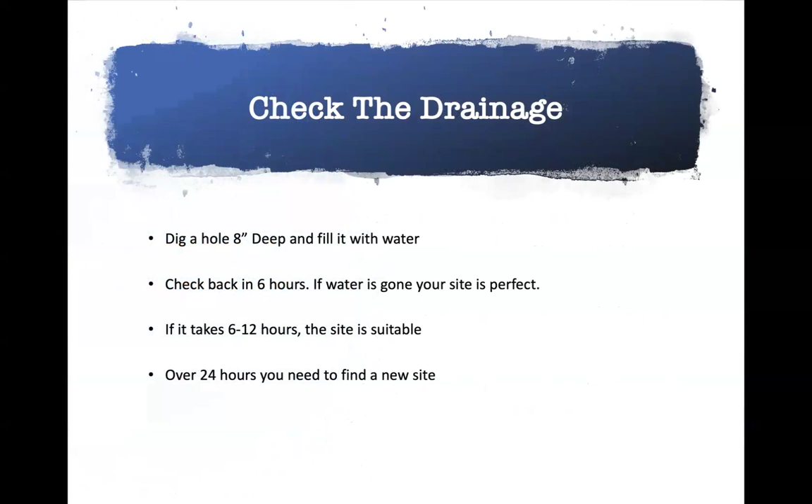And then plant for triple impact. You want to plant for beauty, you want to plant for water capture and water filtration, and you want to plant for wildlife. So why not use all of your native plants in your rain garden and have it double as a pollinator garden? Like I said, just checking the drainage. You want to dig a hole, fill it with water, let it drain. Make sure that your water is not there for more than 12 hours. Anything more than 24, you need to find yourself a new site.

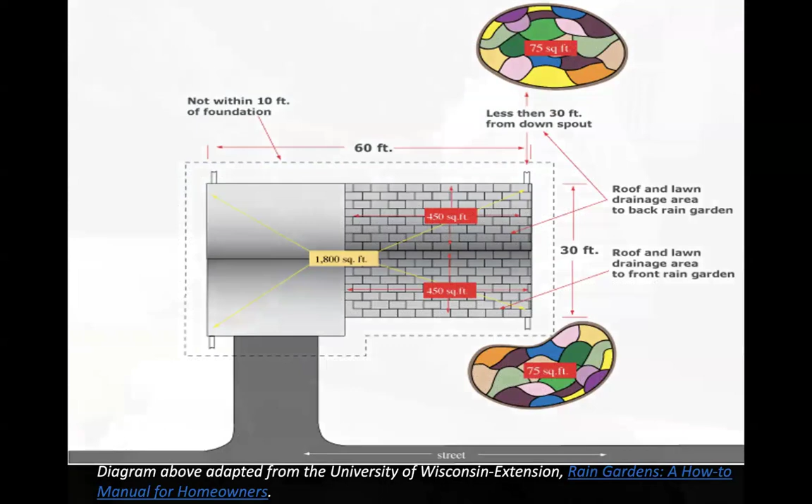I'm going to just kind of move through this, but if you go to the UConn website, you can find all the calculations that you need. There actually is an app for the iPhone. If you put in UConn for an app on your iPhone, you will find that they have sizing tools so you can calculate the size of the rain garden based on the square footage that you are calculating.

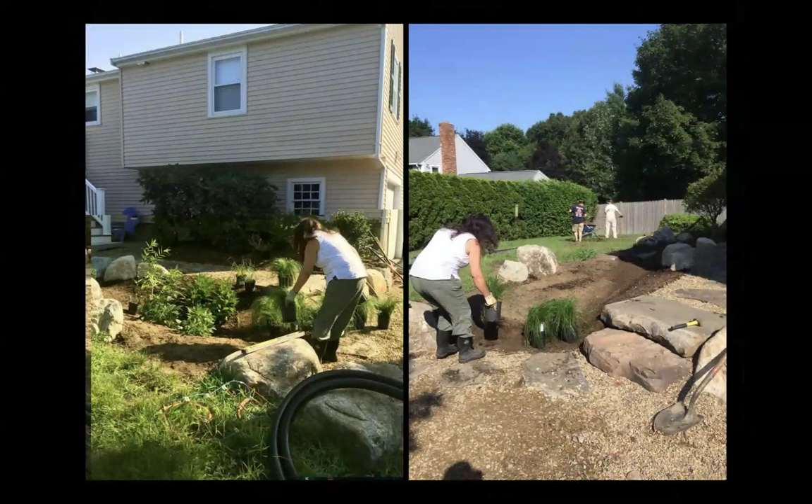Here's just an example of a rain garden for a client who had a slanted driveway and lived halfway down a slope on their street. So all the water would just rush in and pool in front of their garage.

So here we created this rain garden full of native plants, just our favorite native plants, not even necessarily water loving, that would kind of capture all that water and just gave that water a place to drain to. Here we have them all set up, but here they are all planted in. And again, this is just a pollinator garden.

You're going to get online and you're going to overthink about the zones and everything of the water. For a typical rain garden that isn't going to be holding a whole lot of water, you don't have to worry about that too much. And as you can see, it just really blends into the landscape overall.

So this is actually designed to infiltrate thousands of gallons of water at a specific rate, but still it is planted up with many, many native plants in there, but not totally native. But it is beautiful, and it's a way to add habitat and green infrastructure and greenways to our urban environments while managing our flooding issues.

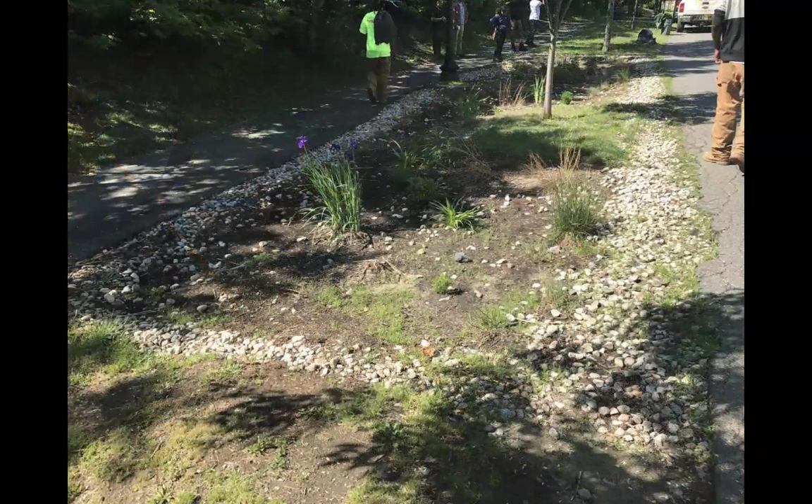This right here is just, I worked with Youth Build Boston and the City of Boston Parks Department, and we rehabbed 5 rain gardens, and then monitored them for an entire season. The idea behind that was to create green jobs.

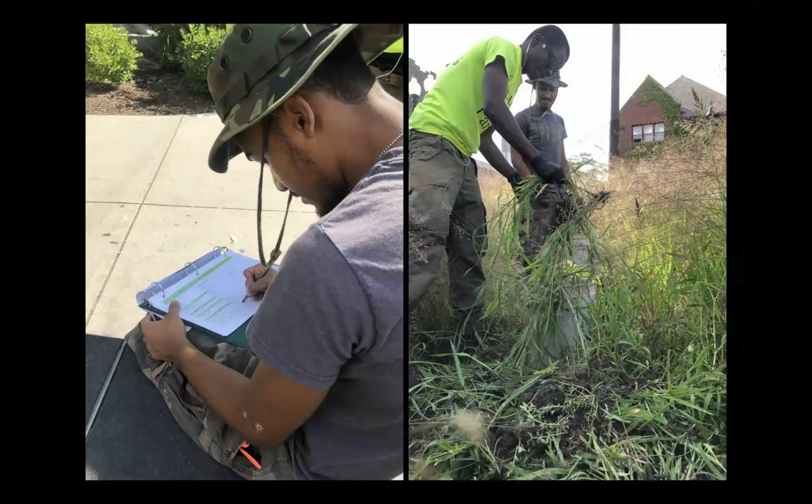So basically, the city said, we don't have people who know how to maintain rain gardens. I got with the youth of Youth Build Boston and said, I'm going to teach you how to rehab and build this garden, and then I'm going to teach you how to maintain it. And on the other end, the city will have hireable folk to fill these positions and to actually take care of their rain gardens. The biggest thing that we do when it comes to stormwater is overthink.

Now you say, well, what happens when that little teeny pit overflows? Well, when that pit overflows, the water just creeps along the lawn rather than charging across the lawn, washing it out. So it took a real simple application to fix that problem, and it was only a few thousand rather than 60.

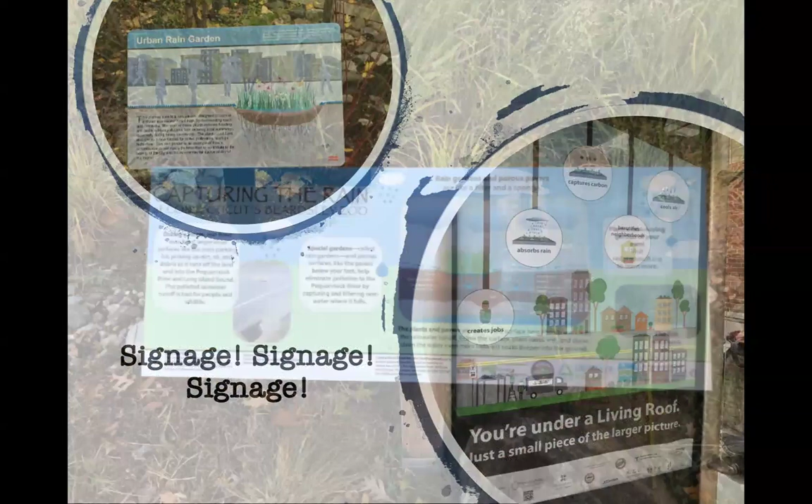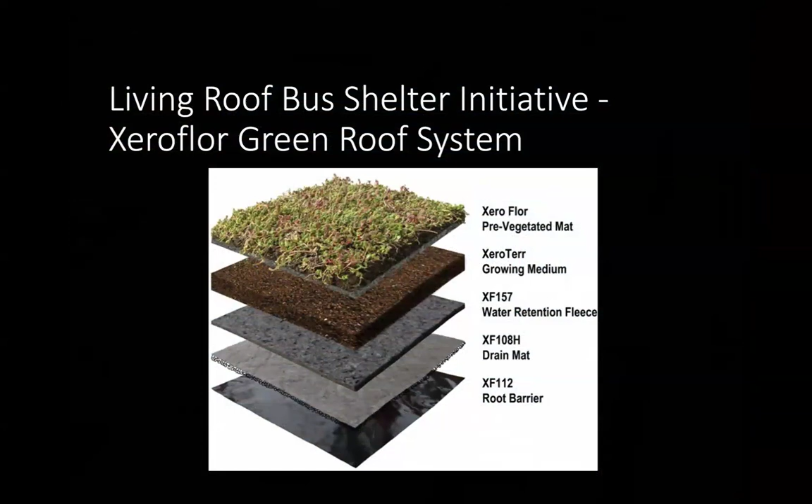I'm almost there. So green roofs. Green roofs, this is kind of the deep end of the pool, but they are not hard necessarily to adopt. Green roofs are very simple to install and simple to manage on a small scale. It's a lot more complicated on a large scale. Here's a client, they wanted to put a green roof on their garage. And you can see they live in a Frank Lloyd Wright house, and they wanted their house to blend into the landscape. So they wanted to have an ericaceous green roof put on the roof here to blend into all of the plants of the landscape.

When somebody asks you to do a green roof, the first thing I ever say is get a structural engineer to look at it, because people will say, oh, just put it on my shed. And I say, I'm not going to put it on your shed. And they're like, why not? It's just a little shed. It's a little green roof. I say, because you keep your lawnmower in there or your motorcycle in there. And if that roof collapses, then I'm on the hook. So I will not touch anybody's roof until a structural engineer's looked at it.

If they want a roof bad enough that they get a structural engineer, then I say, okay, now I need a roofer to look at it to make sure that this roof is entirely waterproof. Because if when I'm done the roof is no longer waterproof, then I know it's my fault, rather than not knowing if it was my fault or not before, and then I'm just going to get blamed. So I always have a roofer check out the roof to make sure that it is waterproof before I touch it. The green roof application is real simple.

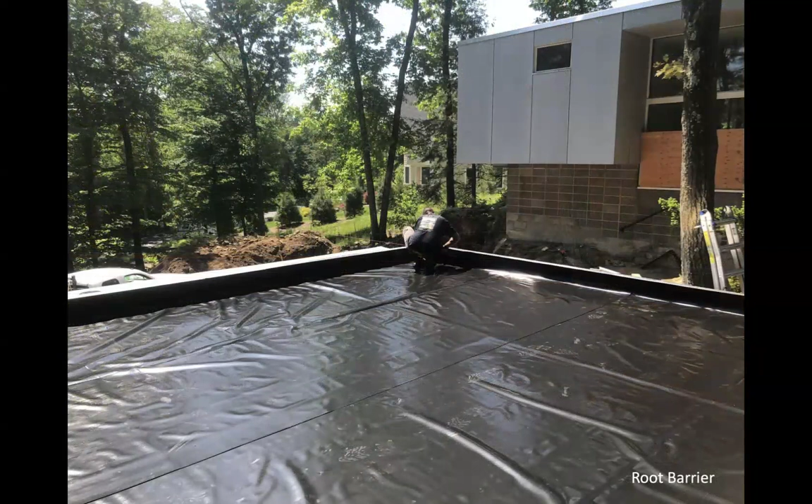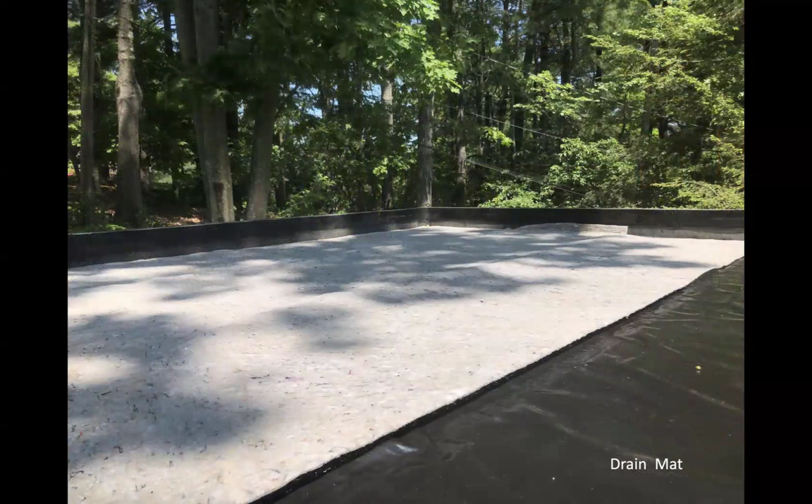You have the rubber membrane that is part of the roof. Then you put down a root barrier. This root barrier prevents any roots from getting into the pores or underneath the seam tape of the rubber membrane that is on the roof, which would cause problems later on as those roots matured. On top of that, you put a drain mat. This drain mat has plastic dimples on the bottom, which creates a vapor layer for the water just to run off, should it pass all the way through the other layers above.

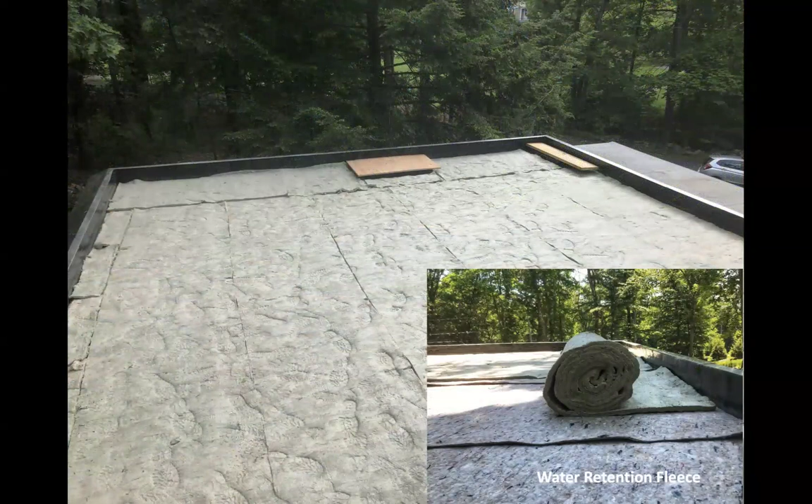On top of that, this was only 4 inches of soil that we were dealing with. So I wanted to make sure that in full sun on a roof, it didn't dry out too quickly. So I put water retention fleece. This is like adding a sponge underneath the soil layer to make sure that we're holding a little extra water and capturing as much water as possible. Then on top, we put a special soil blend so we could plant bearberry and low bush blueberry all over the roof. And there you have it, a residential green roof. Not necessarily too hard. You do need the structural engineer, you do need the roofer, and the rest of it is relatively easy.

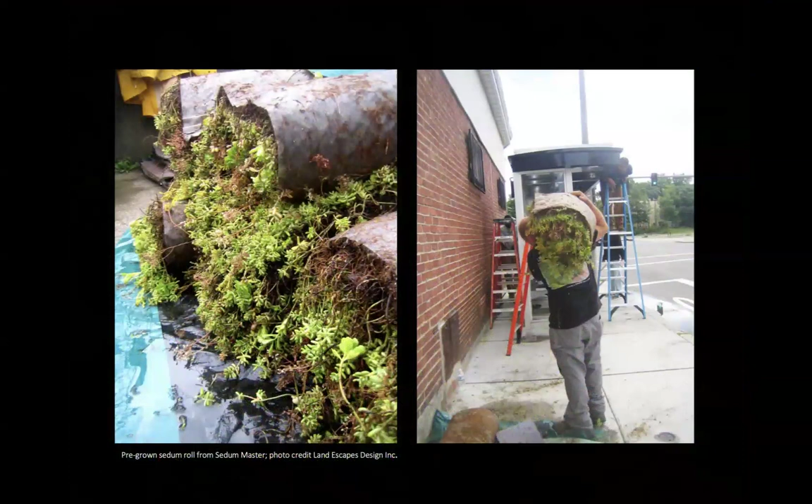This is a project we did in Boston, and we actually just completed 30 bus shelters in Boston. This was a pilot project done 10 years ago. 10 years later, the new mayor called and said, I would like to do this as phase 1 of my stormwater initiative. So my friend and I just finished putting 30 green roofs across Dorchester and Mattapan. We did it along the 28 bus line. You will be hearing about it soon. But the idea here was to show that small steps can make a great impact and bring the conversation of green roofs down to street level.

We seeded them with native plants. During the pilot project, they were up during the summer. They had to come down during the winter. So the plants never really took off. And then when the money ran out, so did the project. However, like I said, it was enough to get people's attention. And 10 years later, here now we've done it.

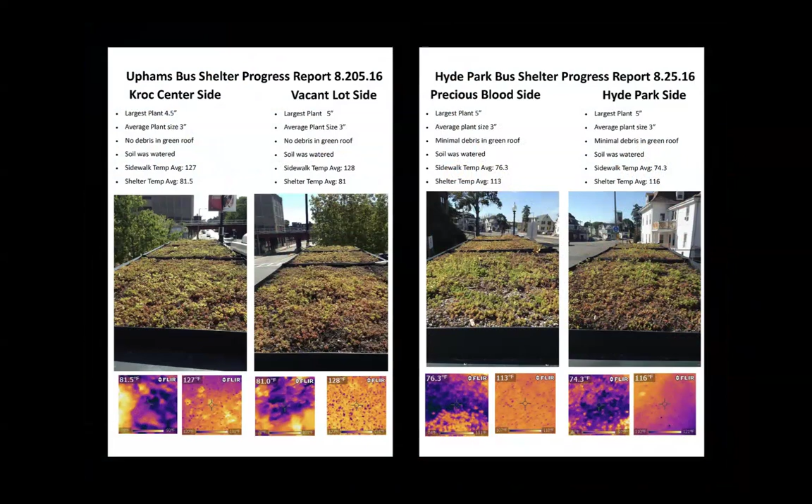Trees are very easy. What we have to do is make sure that we plant our trees correctly. As I mentioned about the street coffins earlier, we have to make sure that our trees get to be of a mature size. I met with a municipality here in Massachusetts, and they were all proud of themselves because they were going to plant 500 trees across the city. I said, how about you plant 250 trees properly and take the rest of the money to make sure that you do so? They looked at me like I was a total jerk

and they had no idea what I was talking about. And then I explained to them that unless a tree reaches maturity, it is not going to be able to actually sequester the carbon that they wanted it to do. And that the lifespan of a street tree is 5 to 8 years. So it really had no chance. And without any soil volume, it certainly has no chance to mature whatsoever. So we need to make sure that we plant our trees properly, but adding more trees is one of the best and cheapest stormwater techniques that you can apply.